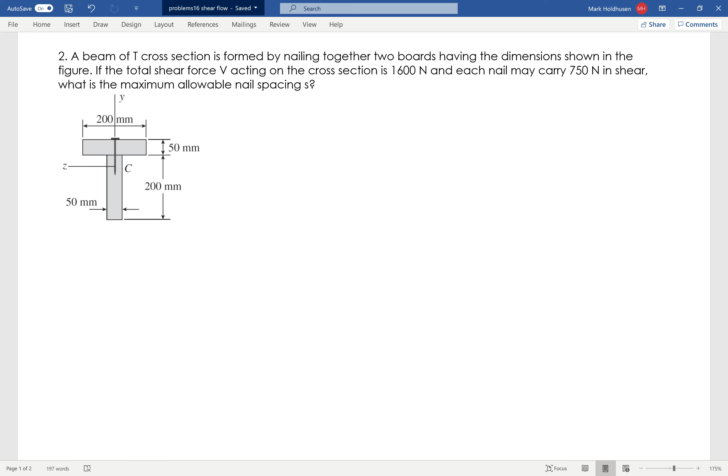Okay, so here I've got a T cross section. It's held together with nails along the length of the beam here. So I know that this is seeing a shear force of 1600 newtons. I know each nail can hold 750 newtons in shear. Again, these nails are along the length of the beam. And I want to figure out basically how close do I put the nails so that this thing holds together.

So I'm going to use shear flow again, q, which is equivalent to the force per length, right? So we're going to use that. That's the length between each nail that we're going to use here. And that's going to equal VQ over I. So the first thing I need to do is find the neutral axis, right? Y bar, so I can base everything off of that, find the moment of inertia, all that good stuff.

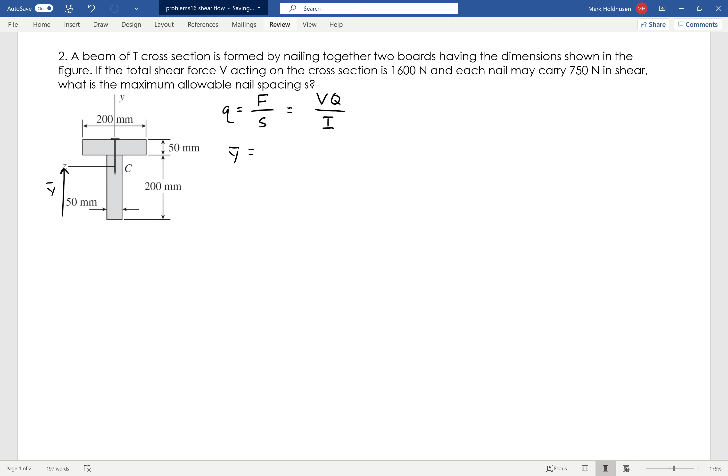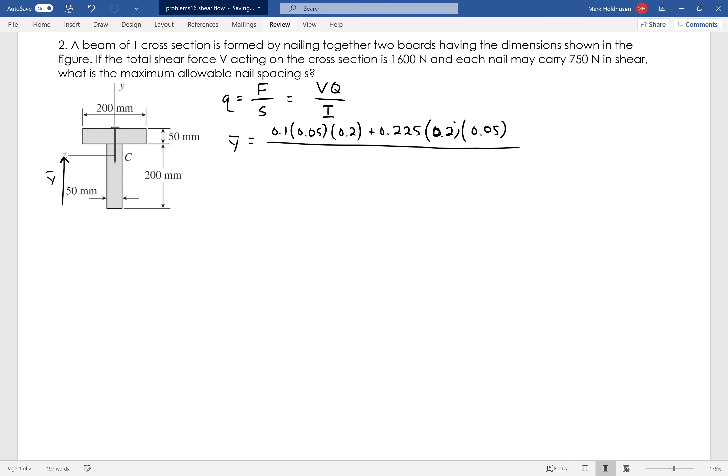So I got two things here, two rectangles here. The first one's at 0.1 times 0.05 times 0.2, and then I've got the top one, which is going to be 225 is the location of that one, and it is 0.2 times 0.05, divided by the total area, which is 0.05 times 0.2 plus 0.05 times 0.2, and I find that the neutral axis is located at 162.5 millimeters, or 0.1625 meters.

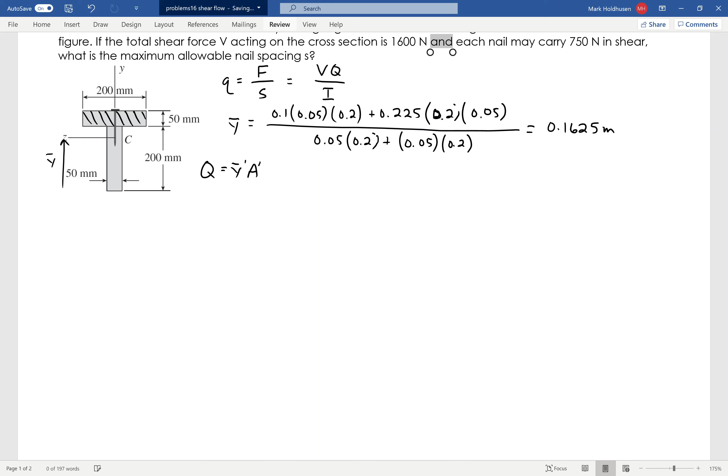Okay, so now that I got that, now I can go ahead and figure out what Q is. Because again, Q is going to be y bar prime times A prime, I should say. Okay, and again, what I'm going to look at is just this top rectangle, because that's the interface between the two boards. That's where the nail is going to shear, is right at this point right here at that interface, right? So I'm going to draw my cut there essentially and look at the area above that, okay?

So the location of the center of that guy is again 225, but from the neutral axis, so I gotta subtract off the 162.5, like so, and then times that area, which is going to be 0.2 times 0.05, okay, and that gives me a Q of 625 times 10 to the minus 6, and again, that'll be meters cubed on that guy.

Okay, so next thing I need to do is find the moment of inertia I. Again, about the neutral axis. So I will start with the bottom one, 1/12 BH cubed, where B is 0.05, H is 0.2 cubed, right? Plus the area, which is 0.05 times 0.2, and then the location of that centroid is at 100, so it's going to be 0.1625 minus 0.100 squared.

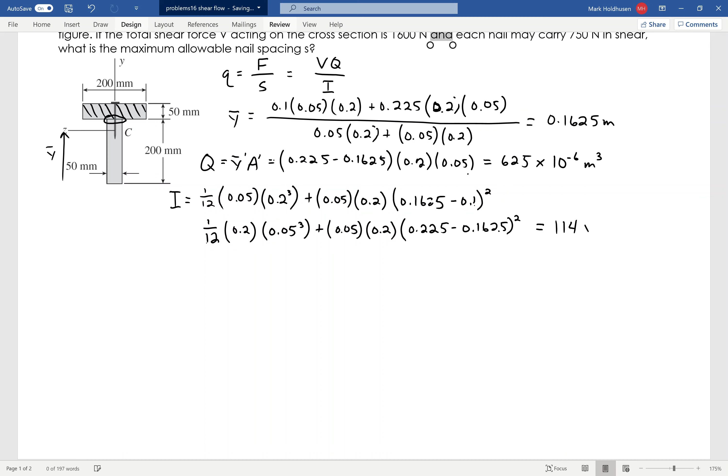Okay, now we do the top one, add it to it, so that has a base of 0.2 and a height of 0.05, okay, times its area, same area, 50 times 200, and then its location of the centroid for the parallel axis theorem is given by that. So I then becomes, adding those together, 114 times 10 to the minus 6 meters to the fourth.

All right, so now I got Q. Basically, I have everything I need. So again, the shear flow is the force per length, right? So basically, I know that each nail can hold 750 newtons, okay? I want to figure out how far to space those. So my shear flow is going to be 750 divided by S. S is what I'm looking for.

And then that's going to equal VQ over I, where V is 1600 given in the problem statement. Q is 625 times 10 to the negative 6. And then I is 114 times 10 to the negative 6. So, solving for that, I can find that the spacing of the nails has to be every 8.52 centimeters.

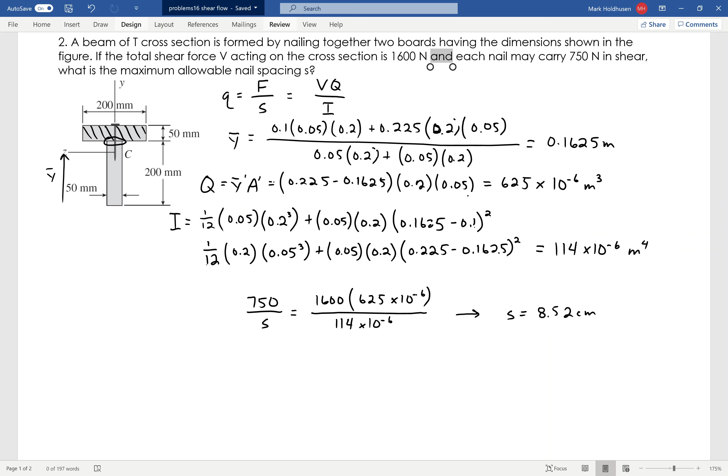Okay, because again, basically what that's saying is the shear flow is 750 newtons per 8.52 centimeters. Okay, so if I do it any more than that, then the shear will be too great on those nails. They won't be able to hold them. So I have to put them at that distance to meet that shear flow that is created by the 1600 newton shear on the beam.